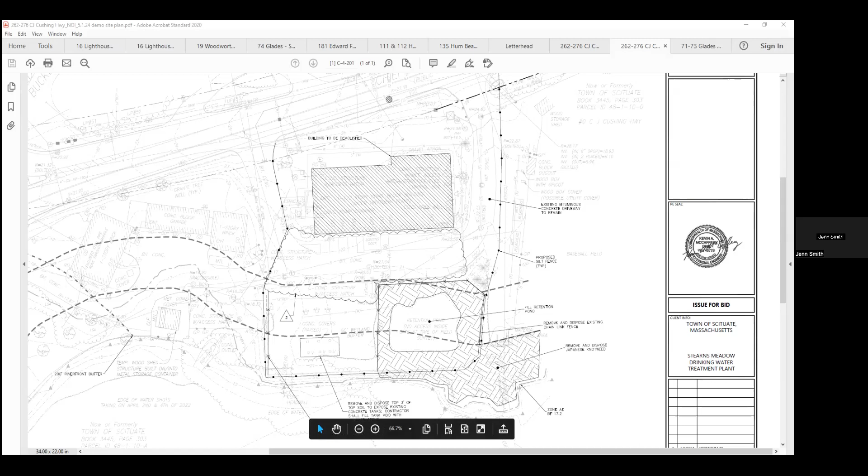We're going to leave it up to Jen to work that out with the DPW. All right. Thank you very much.

19 Woodworth. All right.

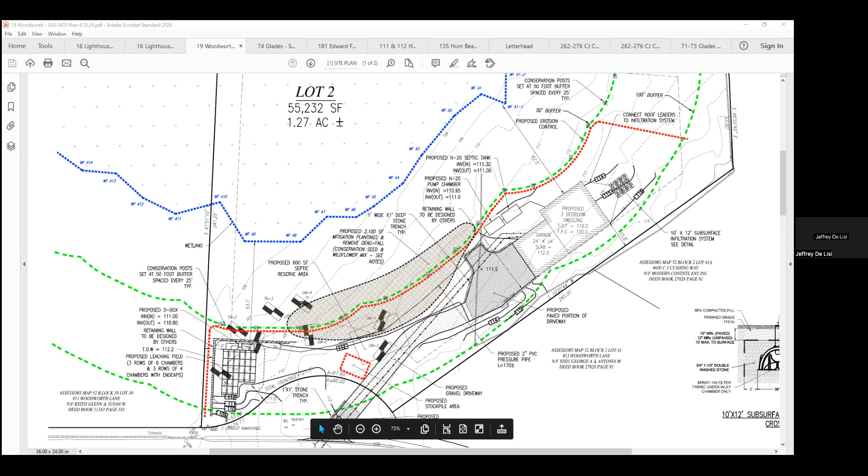We have a request to continue Lot A, Booth Hill Road, to June 3rd. I make a motion we continue Lot A, Booth Hill Road, left field, short left, June 3rd.

I think it's the kids running around. I'm glad he's been able to multitask—sounds like he's coaching.

Anyways, I made the motion to continue to June 3rd. Do I have a second? Yeah, second, Doug. All in favor? Richard, yes. Brendan, yes. Eric, yes. And Frank, yes.

Great, Edward Foster Road, 181 Foster Road. And we have—who is presenting? We have Attorney Brodsky. Yep, I'm unmuting Adam Brodsky. Anyone else I should unmute? Ms. Smith, would you unmute Rick Grady, please?

I'm not seeing him. Can he raise his hand? That would help me. Text him and ask him. We see Adam, but Rick, if you're on there, Rick Grady, can you put your hand up? Not seeing him.

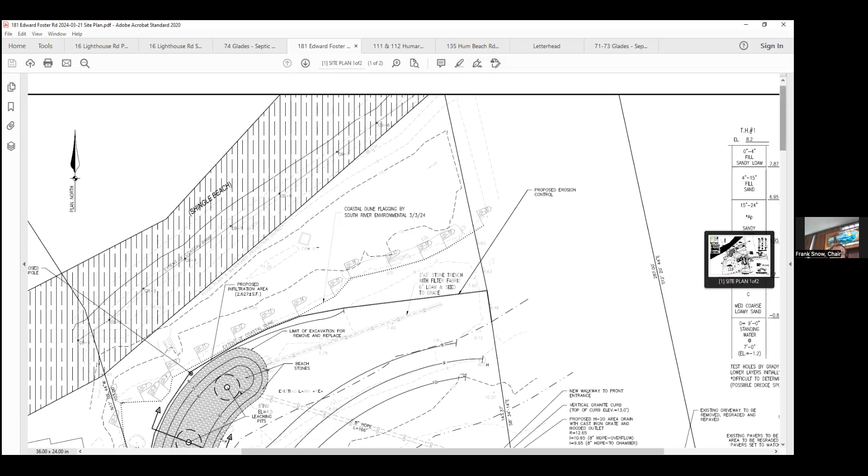As long as Jen brought that up - contours 10, 9, and 8, is that proposed to be regraded? It is, we'd like to smooth that off just so that it flows more evenly towards the proposed low area. Okay.

Thank you. You can see, okay. Those were, yeah, if you want to keep going on the list that had come into question before.

Okay, yeah, we're glad to add the VE zone to the plan. It is outside the limit of work, closer to the water body, but we'll be glad to answer that or add that. We can give you a calculation on the amount of material being removed.

Can drainage calculations be submitted to show this infiltration area can handle what is being directed to it? This is more of a volume analysis than a capacity analysis. We're trying to take the volume of what's currently inundating the lawn there so it can maintain that lawn in a fashion that'll keep the Phragmites from coming back, putting as much of that volume in the ground as we can. So the analysis we're looking to do is give you the volume capacity of the proposed infiltration area and a sense of how much ponding that will remove from the surface.

Is there a reason pervious pavers or a pervious surface is not being considered for the driveway? I believe part of the easement agreement is he's supposed to maintain that as a hardened surface. We can talk a little bit about what that means or doesn't mean, or try to get a better answer on the easement language for you.

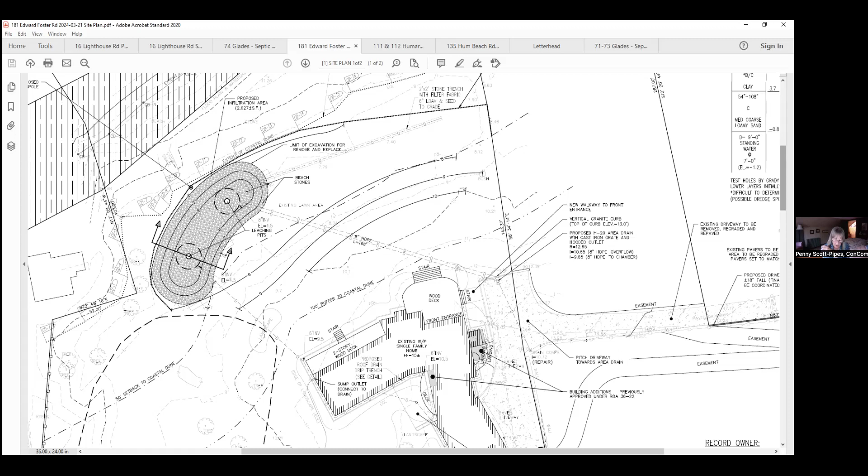All right, I'll make a motion we continue 181 Edward Foster to May 20th. Second it. Second from Richard. All in favor? Doug, yes. Brendan, yes, and Eric, yes. Great, Frank, yes. Thank you. Thank you very much for your time. Good night. Thank you, Rick. Thank you, thank you.

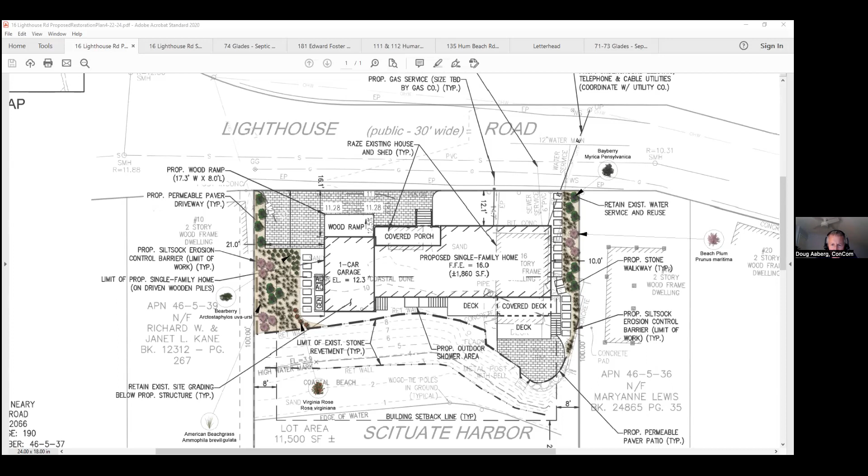Yeah, that would be the lot area. I know that's technically probably correct, but some of that land is underwater, so you're not going to get any further. When you're looking at pervious or impervious areas, do you follow my thought process here? That's underwater, it's not going to be affected by whatever kind of mitigation is in there.

So we don't have that, I think it's maybe something we need to talk about. A mean high water calculation for impervious might make more sense, because that's what you're going to be affecting. But what that does is it raises the amount of impervious area. If you're just looking at them because of the math, it makes the percentage of runoff, the impervious percentage, all of a sudden become well over 20%, like 25% of the lot or something like that.

I don't know what we normally do on something like this. This one's so obvious, I never really thought of it before. It doesn't change the difference, I mean, but it changes the numbers.

Well, it's a good point, especially when you're seeing the size of the structure as this one and really what they have for upland. It's all beach and dune, so it's all resource area. So normally the benefit is elevating the home, that's your benefit. For some other examples I'm thinking of from Humarock, where the footprint's gone up and it's been up on piles, but you don't extend much farther than that.

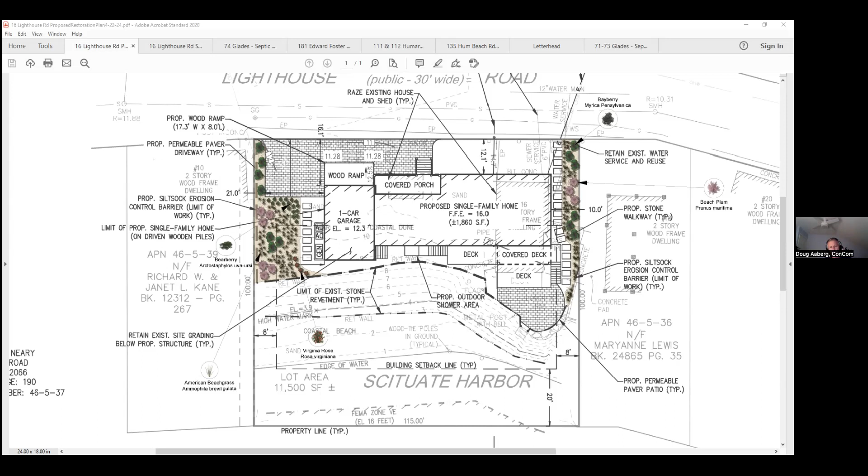Okay, Erik, if you can report those in terms of percentage, because that's how the bylaw is written. So you have your existing condition, then everything that's going to be removed subtracted from that, and then what's proposed, and you'll have a net increase. Understood—so you're looking for percentages of impervious coverage in the pre and post development condition. Exactly, yeah, because that's how the bylaw is structured. Okay, thanks.

Okay, and then I guess I can add about the pervious pavers—the issue being they block the ability for the sand to move, so for the dune to function, and they contribute to storm damage. It's going to increase the speed of the water going across it instead of soaking in. Yep, that's my non-engineering verbiage.

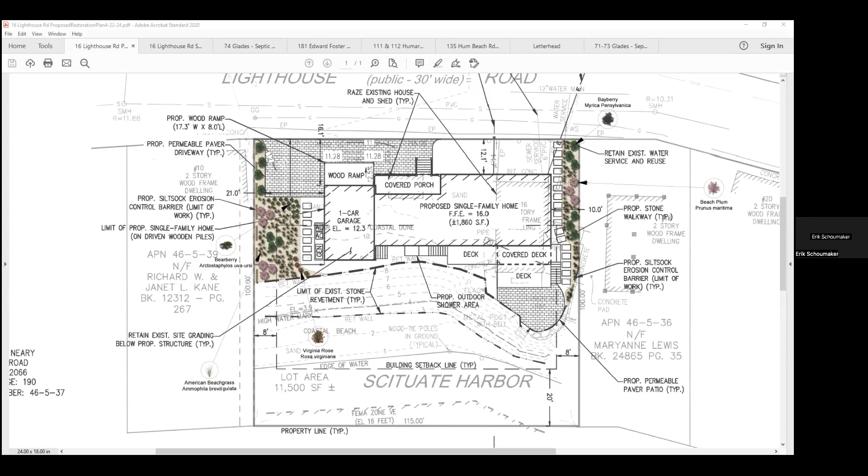Well, folks want the sand to move, Richard. There you go—yeah, the intent was to provide a pervious paver that would absorb stormwater and leach it into the native soils beneath it. But we can look at that and remove it. In a storm, it's not going to soak in fast enough—it's just going to run right across it.

Either way, okay. So, do we have anybody in the audience, Jen, tonight? If they can raise their hand that would be helpful. I see a couple hands raised there. All right, so I know Alyssa—does Alyssa have any comments for the project? You got a few hands, otherwise I'll go to some of the other ones.

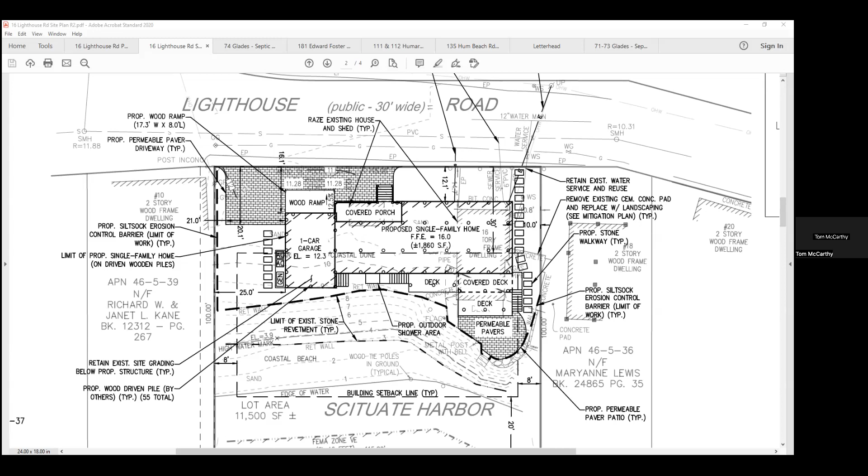Again, you're entitled to the process. Abutters have the opportunity to bring things in, and then the commission has to disseminate what's pertinent to our commission and what is not, and we have to do that, because certainly all kinds of emotions will run on this thing.

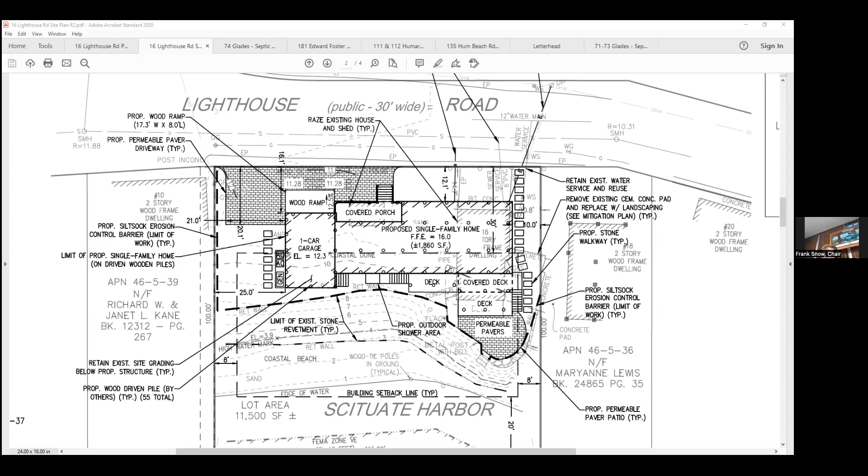We're done for tonight. Well, the question is, do we continue it or just drop it? Sometimes I want to continue it until we have that in writing that they're withdrawing it. That's a good point, Jenn. Why don't we continue this to the 20th and request that in writing? What about the 20th, Jenn? Are we okay? I think let's make it happen on the 20th.

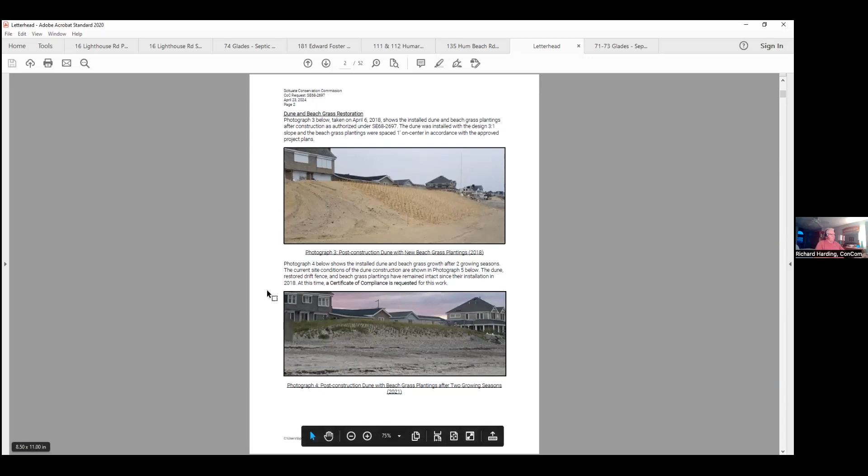Okay, so I'd like to make a motion. I make a motion we continue 16 Lighthouse Road to May 20th. I second that—that was Brendan. All in favor? Richard? Yeah. Doug? Yep. Eric? Yep. And Frank? Yes.

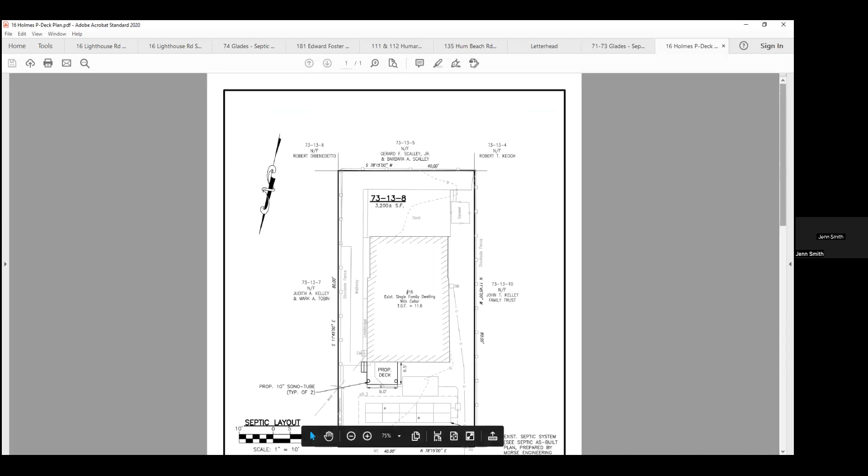If you're okay with it being a minor modification, say yes. Do we have a drawing? Hold on, I think I do. I'm almost there. Okay, there it is.

So what do they want to change? This deck is what they're adding to the septic work they were doing on their site. We have a hand up - I think that's the owner. I see an existing septic system and a proposed deck - are they talking about another deck? That's what they're asking to add.

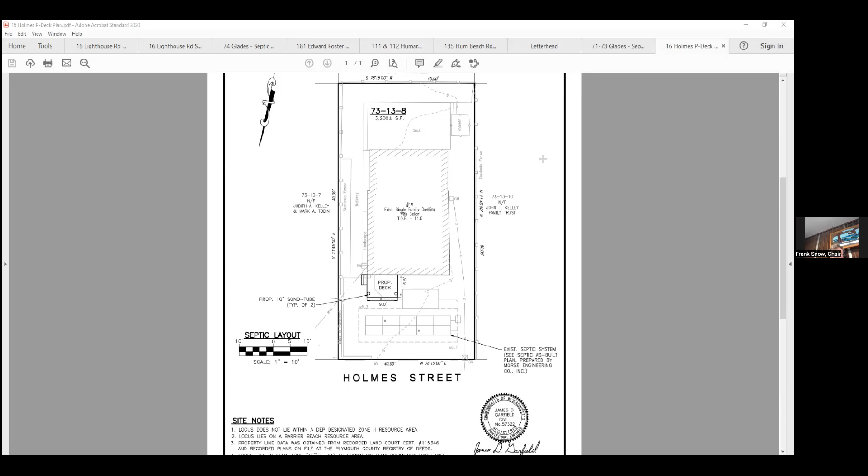Okay, can we just let Mr. Hathaway explain it? Good evening, Ron Hathaway, the homeowner. There was a small set of stairs there with a landing that was taken out when we did this new septic system, so I'm replacing it.

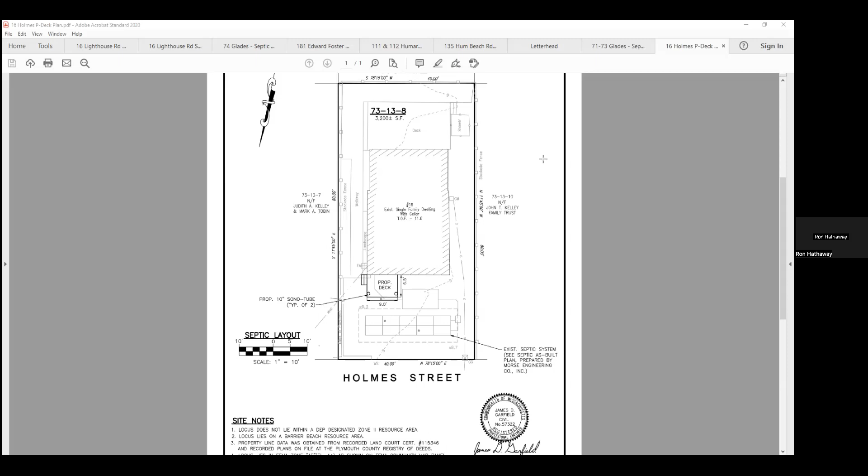At the time Morse did the drawings, I didn't realize we needed to put a couple of tubes in the ground - the previous owner just had the stairs sitting on the slab. So I asked Morse to update this drawing with these 2 tubes so we could put the landing and the steps back in.

Seems like a very minor modification to me. Okay, so actually a minor modification, Jenn, you can just issue that. We'll skip the vote. Great, thank you for the explanation. Thank you very much.

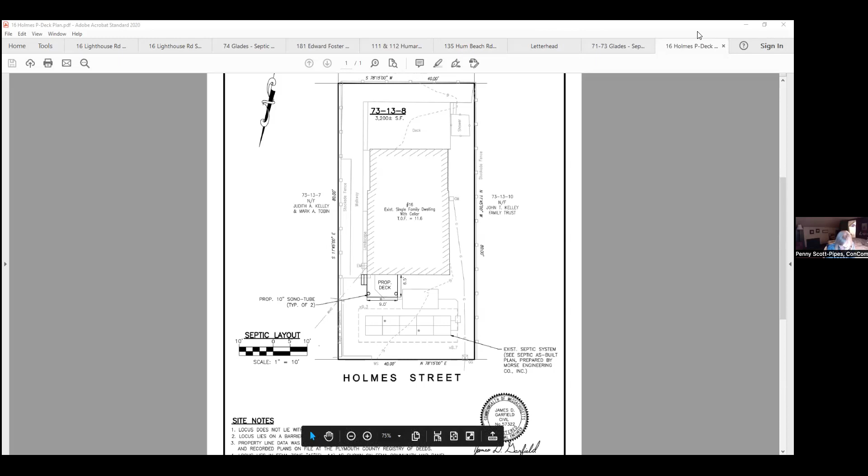I don't know if there's going to be any discussion on 285 Central Ave, so I'm going to leave those orders aside and we're going to do 9 Mitchell Ave, 9 Collier Road, 91 Surfside, 817 Country Way, and there might be some controversy on Crescent. So can we do those first?

I make a motion we accept those orders as written, excluding Crescent Ave and excluding Central Ave for the moment. That's a motion from Penny, seconded by Brendan. All in favor: Richard, yes. Doug, yes. Eric, yes. Frank, yes.

Okay, great. Now I don't know if anybody has put the 285 orders - oh okay, let's go back to 285 Central Ave. Jenn sent out a very nice set of orders with it highlighted. I personally don't have any problem with the orders she gave us, but I don't know if somebody else does. I guess we'll open it up to discussion.

Does this have to be unanimous? No, we can vote on it. I'll go through it one by one if anybody wants to make a comment before we vote.